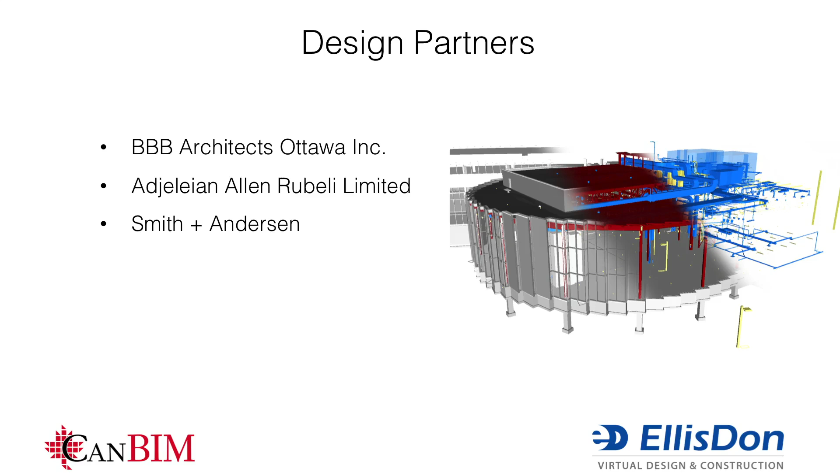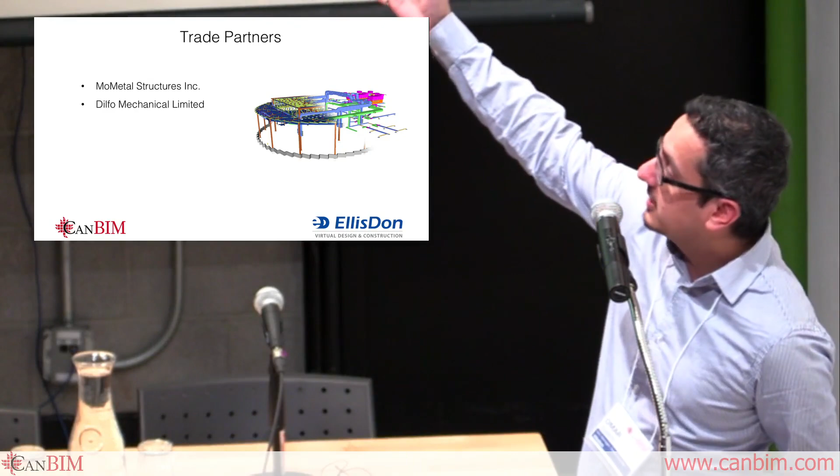Yeah. So this project, we had a lot of input from our designers and our critical trades. So the designers are BBB Architects, Ottawa Incorporated, AAR Limited, and Smith + Andersen did the electrical and the mechanical. Our trade partners were MoMetal Structures and Dilfo Mechanical Limited. And you can actually see their work right there. That is actually MoMetal's steel model, and that is actually Dilfo Mechanical's mechanical model.

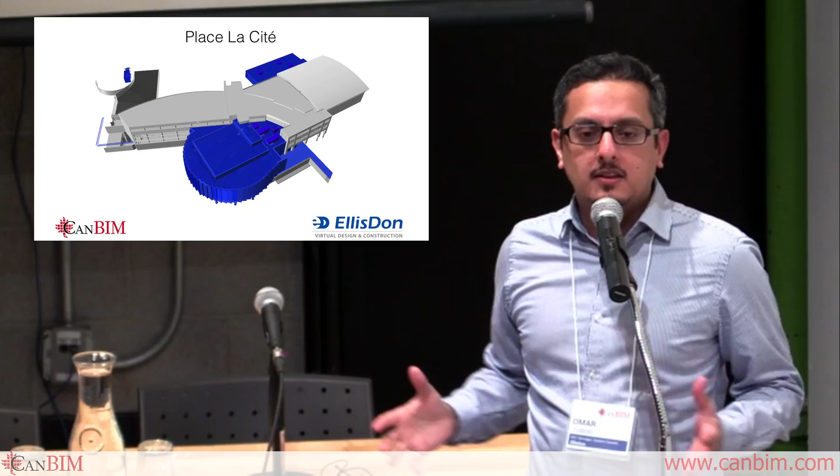And now you're wondering what the project is. So the blue highlighted is actually what the project is. The gray area is existing. So we're adding in this large circular atrium space, which is going to be mixed use. And in the back of the building, it's a prefabricated structure that's expanding the athletic space. What you don't see on this is also some interior work. So they're going to be adding a bistro on the inside. And this is all existing space.

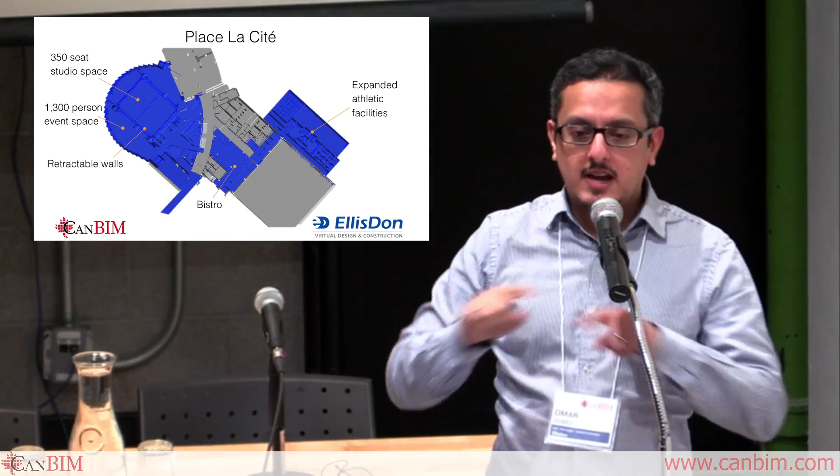So if you go back to the presentation just before mine, laser scanning, getting an idea of existing conditions and so on. So there's definitely a lot of existing conditions. And the way La Cité is built, it's in a big circular shape. Down the center corridor of this massive circular shape, you've got your main utilities, your main services. And this construction is going to be tying into that, right down that circular corridor, you can see there right next to the largest portion of blue in the bottom left corner.

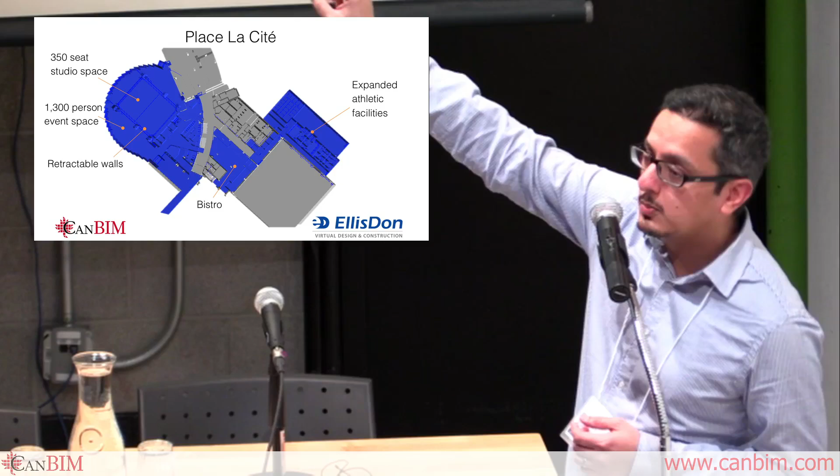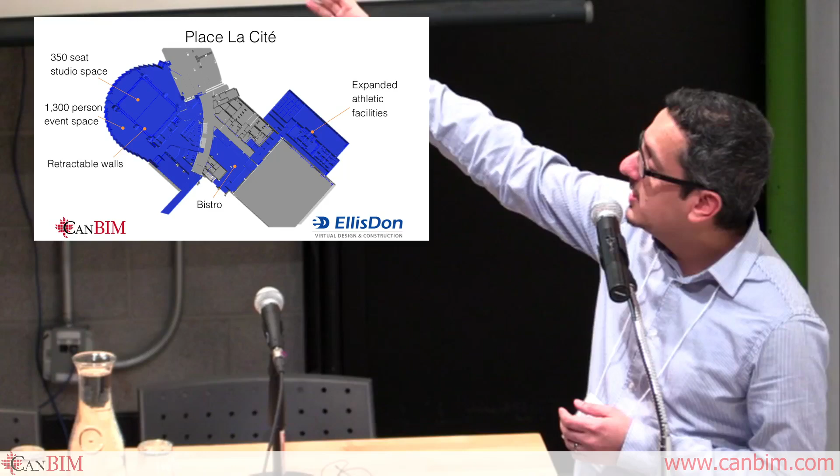And so it's going to have a 350-seat studio space, and it's got retractable walls. Once those walls are retracted, you're going to have a 1,300-person event space. So Jerry, if you're listening, maybe next year we can do this there. That'd be pretty sweet. And obviously the bistro and the expanded athletic facilities.

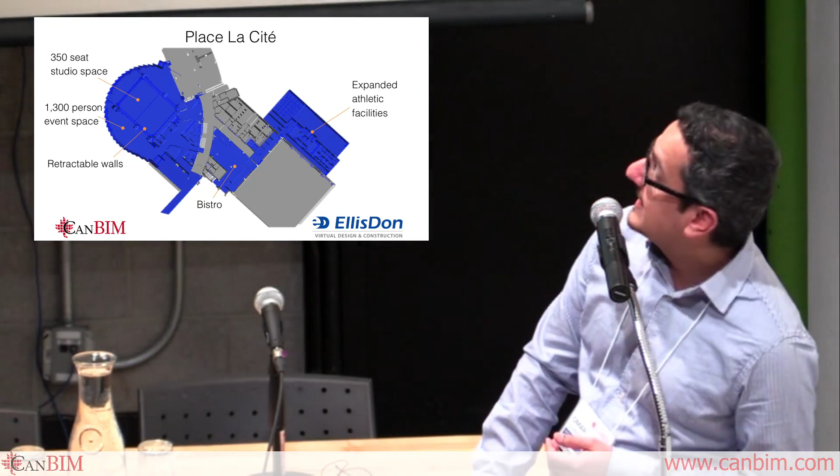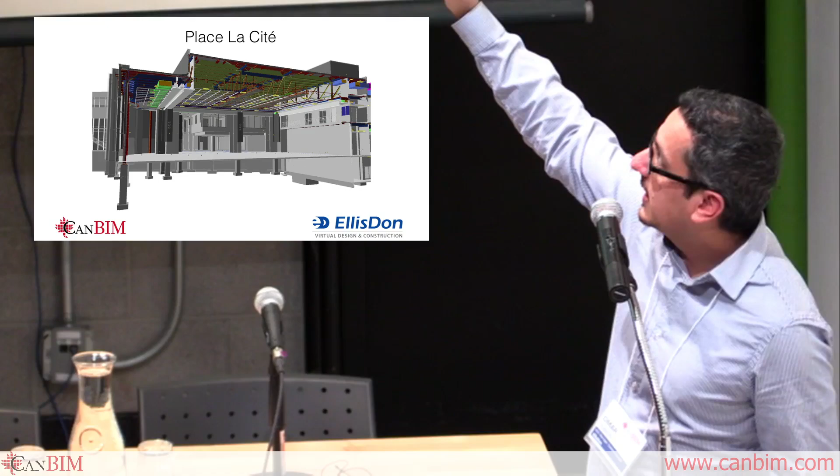And just to give you a sense of perspective, that's actually double height. So you've got 2 stories of open space, and then you've got a catwalk, similar to a theater, above. You can just barely make it out. It's in orange, and you can see all the M&E that's happening.

So normally you'd think, wow, this is a big open space. It shouldn't be difficult. But the bigger the space, the more important it is to the client that it needs to be as big as possible. So the client tends to squeeze ceiling space as much as possible, which tends to give us a lot of headache when it comes to putting in the massive ductwork that you need to push the air into this wide open space.

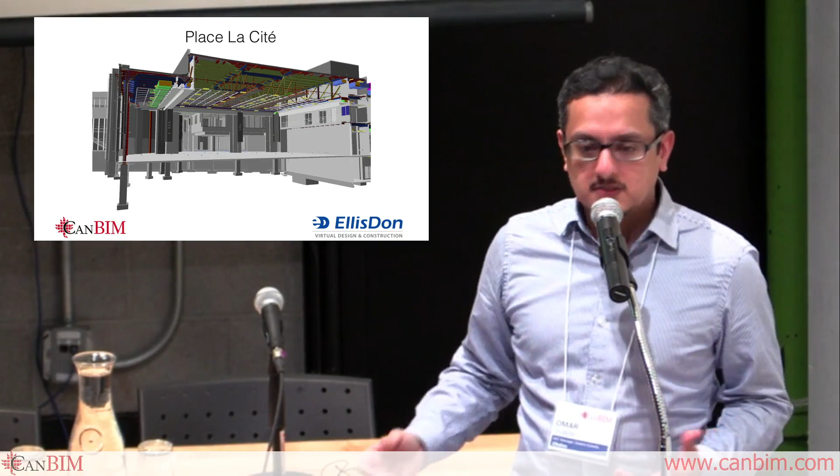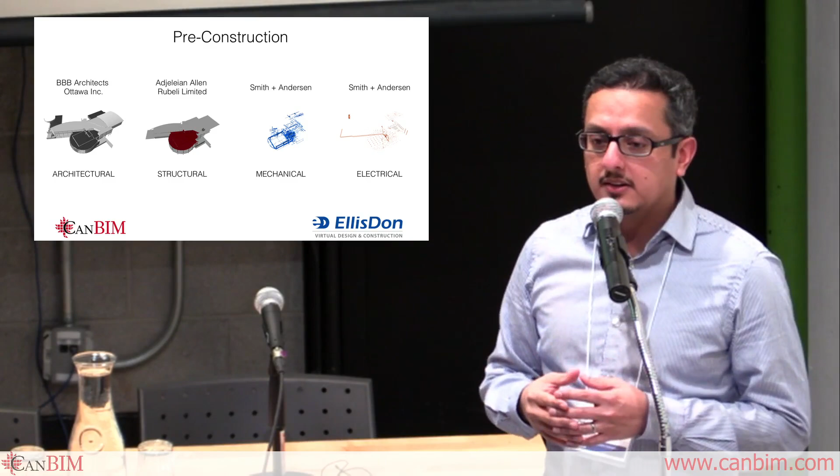So for pre-construction, of course, we had the architectural model, structural, mechanical, and electrical. And we also did a significant amount of design coordination, as the title indicates. The designers were attending weekly meetings, taking the clashes, having discussions, and it was a very collaborative experience.

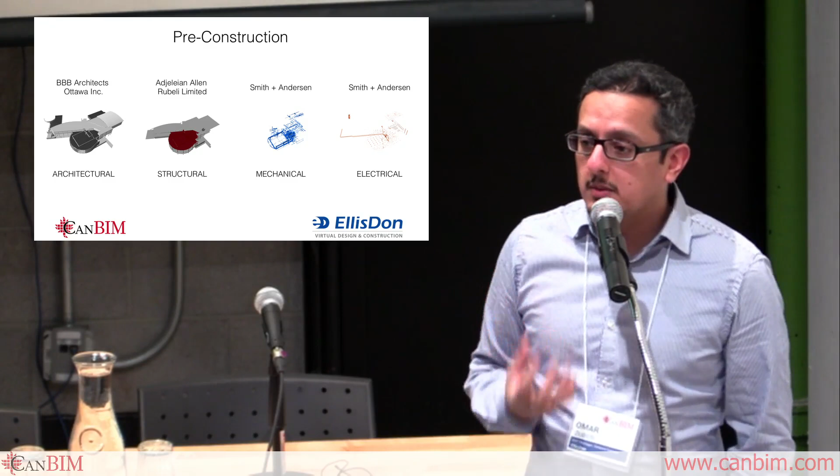And one of the things we did, this was an EllisDon initiative, pretty much internal, where we took the architectural, structural, mechanical, and electrical models and pushed them into Assemble. So Assemble is an online system that basically lets anyone with a web browser log in with the proper credentials and view and interrogate the model.

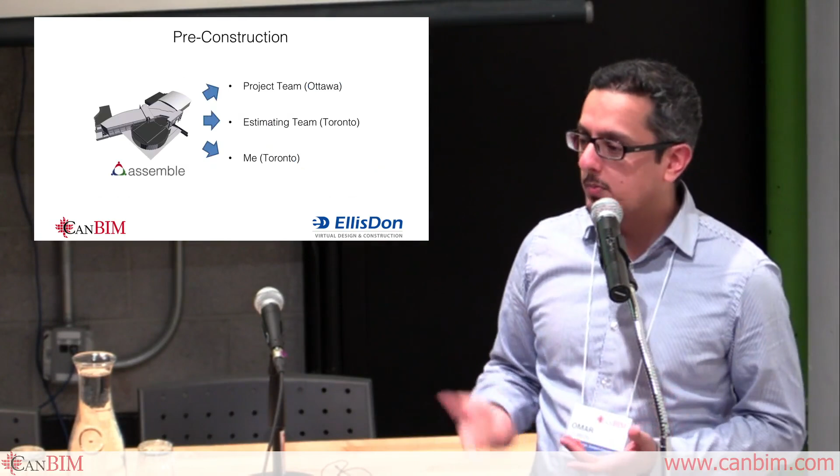The project team in Ottawa on site was able to, with their internet access, open up their browser, go to the website, get a sense of the space and what's going on, and potentially do some planning on what they're going to do next out on site.

The estimating team in Toronto can all attack the model at the same time and start tagging different objects, and Assemble has this great thing where you can extract quantities. So similar to the schedule extraction that you can do straight in Revit, this is, I'd honestly say, a better system.

Revit lets you do some level of filtering, but if you really go crazy with this, you can actually use SQL search queries, structured query language, to really filter down the information that you're pulling from the model with regards to quantities, with regards to counts and so on and so forth.

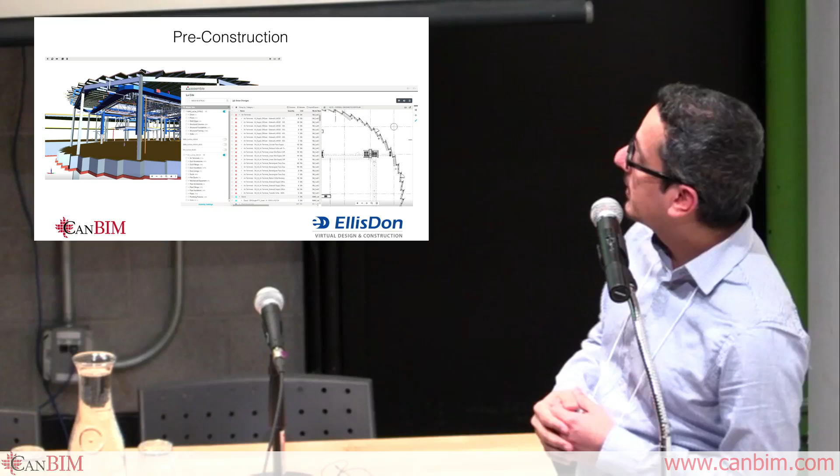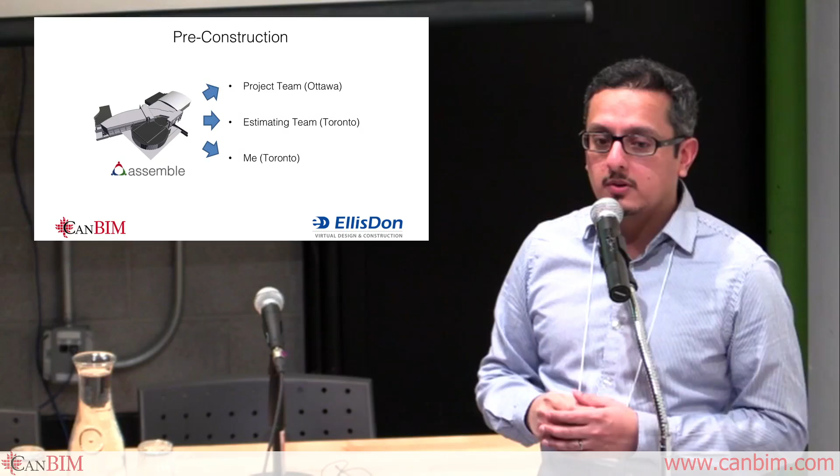And of course, jumping back a slide, I was in Toronto. This entire time, this project's happening in Ottawa, and I'm sitting in Toronto overseeing the design coordination meetings, and making sure everything's available to everyone here in Ottawa.

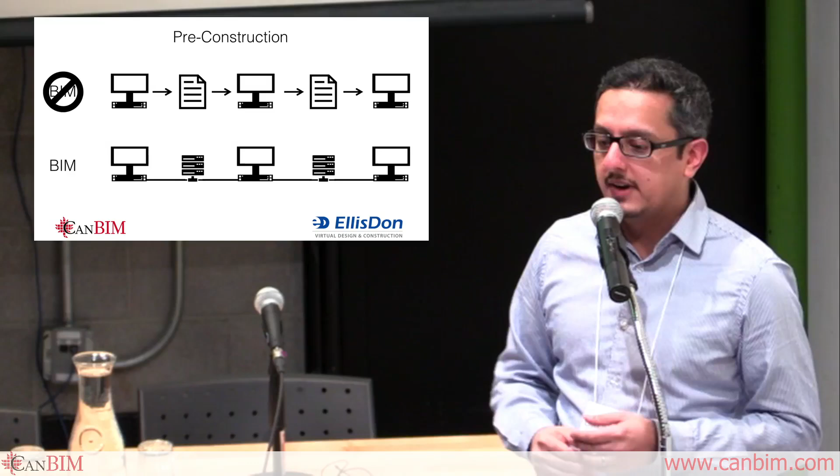Another big thing, a lot of people here are familiar with how things went before BIM. Oh, you've hit 50% design development, stop what you're doing, produce some 2D drawings so I can review it and make sure you guys are on the up and up. Never mind what happened all the way up to that 50% DD. We're now going to review it, make sure your drawings are up to speed, and then we're going to say, no, this isn't good enough.

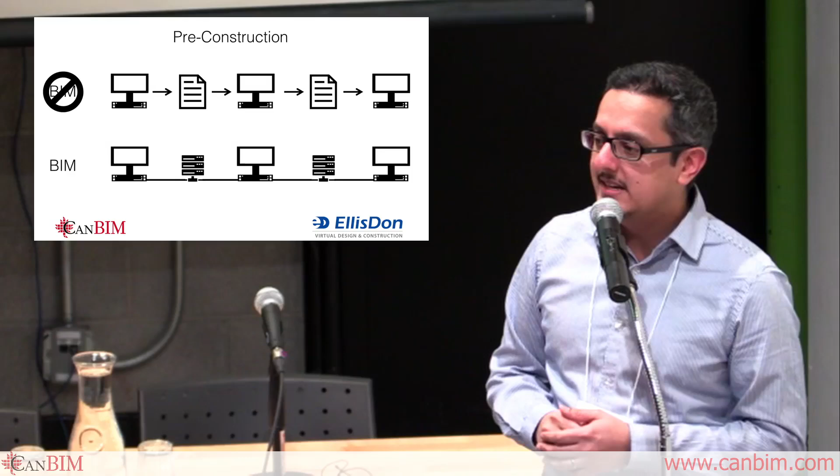So it's a static... forget the word. It's not the most cohesive and collaborative of processes. Whereas once you have BIM involved, once you have something like Assemble, everything's digital. You don't have to stop what you're doing and flatten your 3D into 2D and produce drawings that are up to snuff, that are 50% DD level, and hand it off to the next person to review, red line, and hand it back.

So in this case, we're getting weekly progress models. Every week, we're just getting these models. They don't have to do extra work in order to provide us this information. All they have to do is just give us access to their FTP. The work they're already doing, we're able to plug into. We get this information, we interrogate it, we query it, we ask our questions, and it updates on a weekly basis. It's a much more collaborative process.

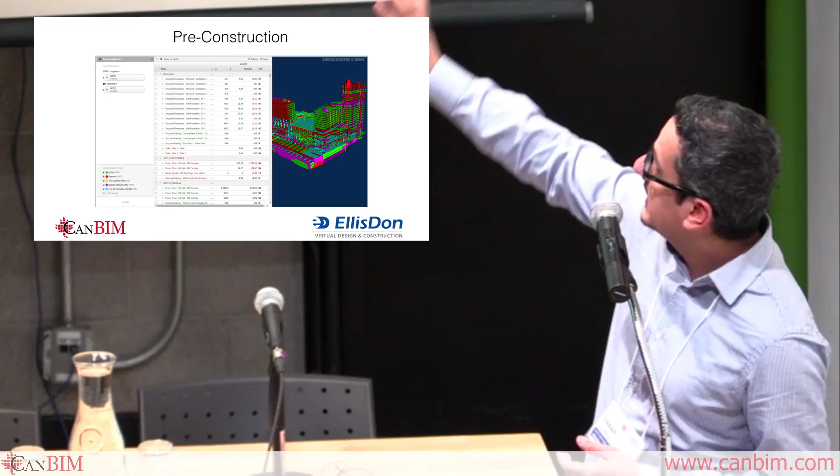Another nice thing about Assemble, the different versions. You can actually compare different versions. I get a new version of a model week after week, and I can go back to any previous version and compare it. It literally color codes it for me. With 2D drawings, every time you give me an updated drawing, you got to cloud what you changed. Guess what? This does it automatically.

And then I can also whittle it down and only show me things that have been added, only show me things that have been deleted. So I can quickly extract that to Excel, plug that into my estimate, and go about my day.

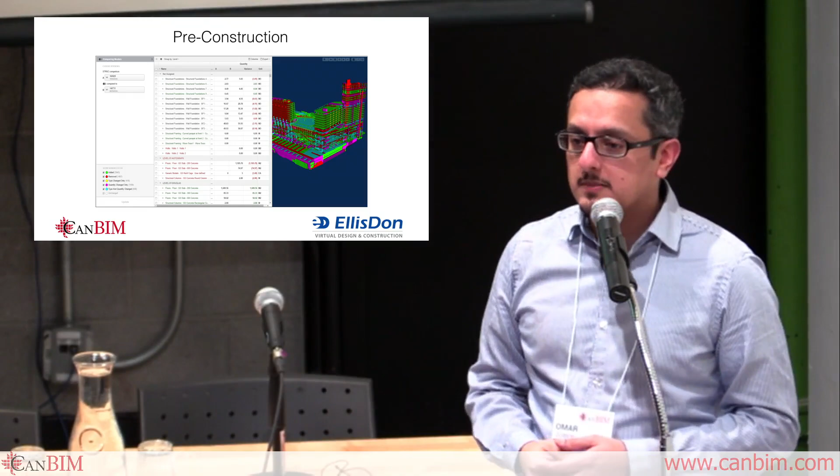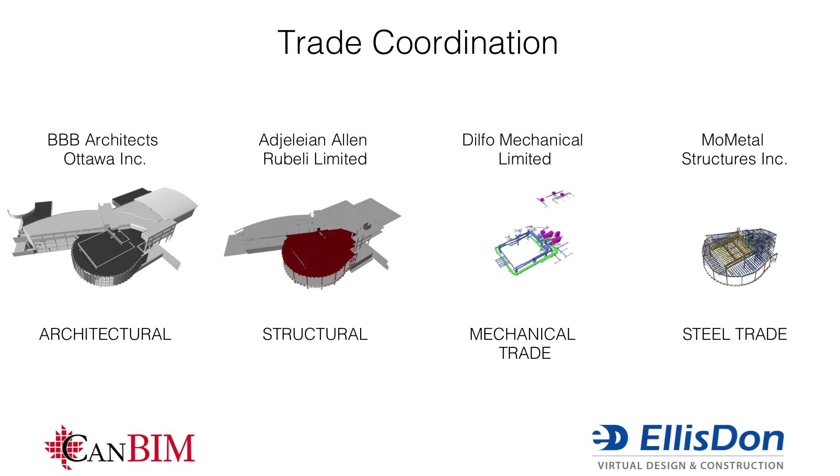Trade coordination. We still took the architectural and structural models, and then we started plugging in the mechanical models and the steel models. And this is where things really started getting interesting, and where we start using Navisworks heavily. Navisworks is when we really start getting into the interference coordination, and we start to look at, well, okay, this doesn't work this way, how about this way?

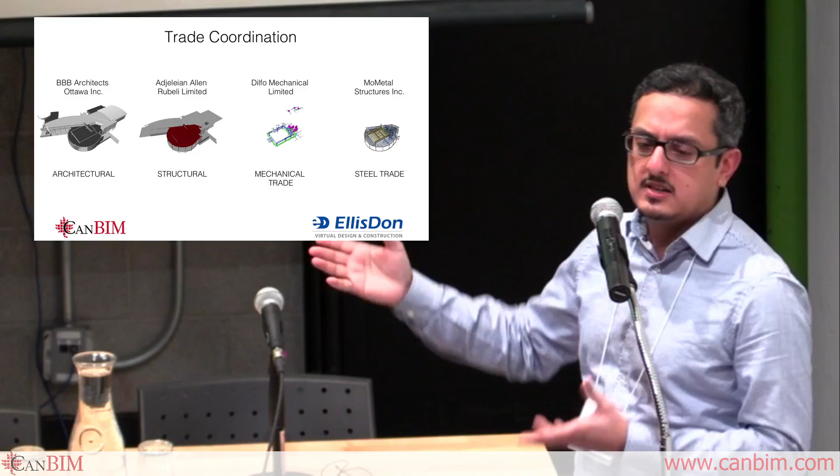We start taking viewpoints and screenshots, and having online conversations saying, is this a design issue? Can we fix this through means and methods? Can the trade deal with it? Or do we need to send this back to the designers to figure out? This giant duct doesn't even fit in this corridor. Can we downsize the duct? Can we upsize the velocity of the air? So on and so forth.

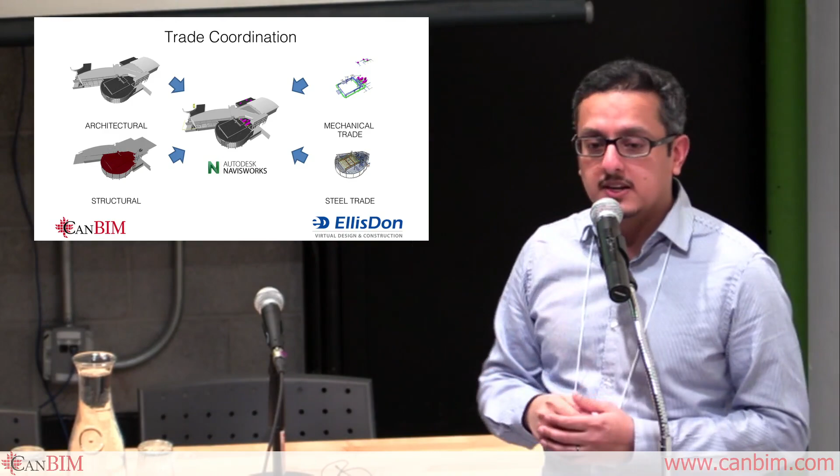And of course, that file. Assemble was nice. It's a website. Everything's up to date; whenever anyone logs in, it's the latest stuff. Navisworks, on the other hand, I need to send out the latest. You have to go to the FTP and make sure you've got the latest file. You download it, and this one file has a full history of all our clashes, screenshots, and communications. You can slice it and dice it and take your own screenshots any which way you want. And it also serves as a nice historical database.

So every week I'm creating a new file. I still have the old file. We can still go back and get our information on, well, where did we go wrong if we went wrong? Or why did we do this? Oh, well, in week 3, this is why we did this, and so on and so forth.

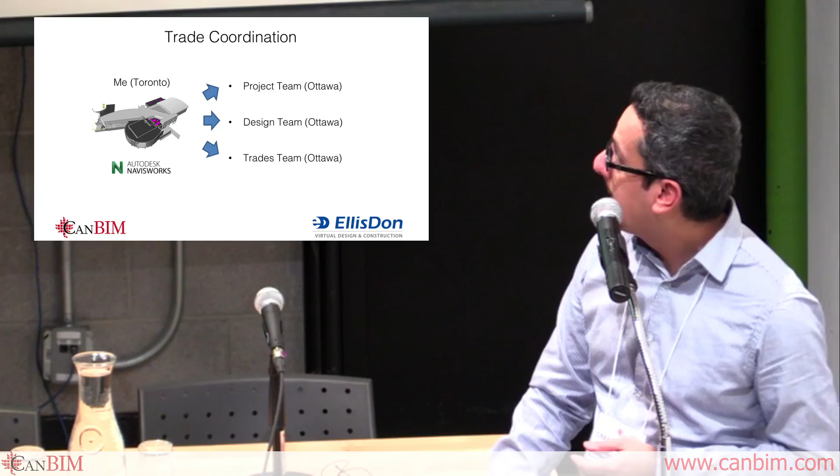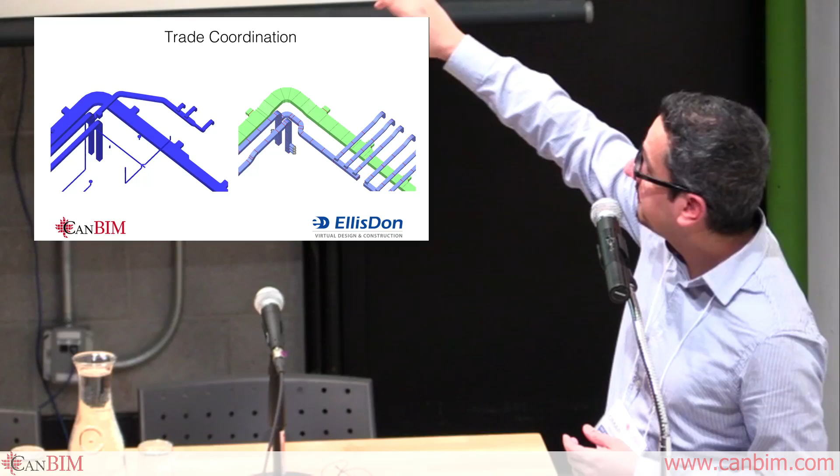So Dilfo Mechanical went ahead, they've managed to figure out how to reroute it, and they got the designer's buy-in to actually reroute it that way and actually have these extra long fingers to the vent locations near the windows. So this is a perfect example of if this hadn't been figured out now, then we would have been stuck scratching our heads at construction time. We would have had to squeeze the duct in order to get it to elbow around where it does, because the steel would not have been dropped as low as it needed to. So this is a prime example of why coordinating well ahead of time helps the finished product.

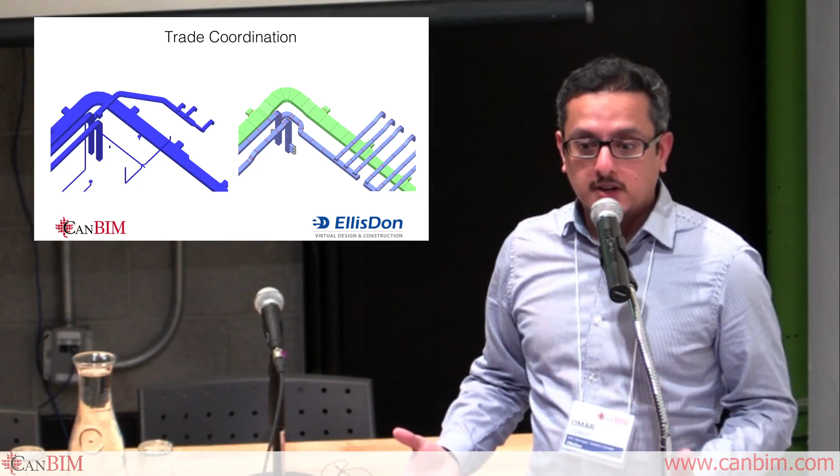And of course, that's actually trade coordination. You can barely make it out. But there's the steel, there's the duct, there's even more duct, there's piping, and that steel had to be rearranged multiple times. So we have these large air handling units on top of the roof, and obviously it's got steel to support those air handling units, but at the same time duct is coming off the underside, right above used space, right above student space. So in order to get these massive ducts to squeeze into the ceiling, not only do you have to get them past the steel, but the steel has to line up with them. And you also have all these other services running around them.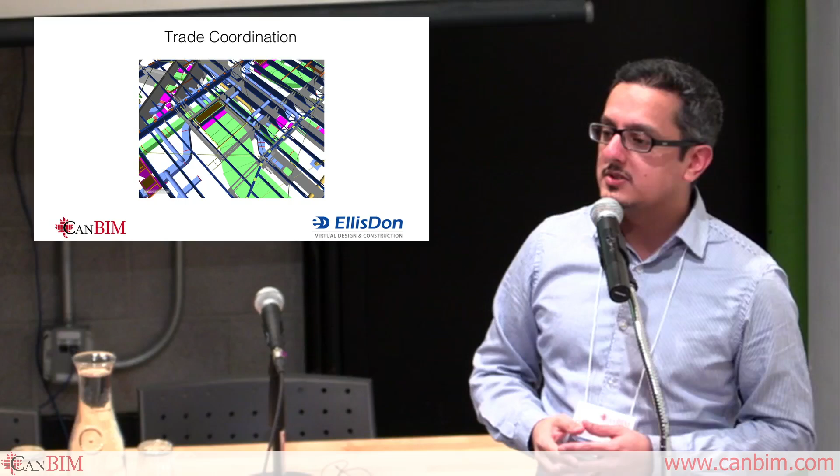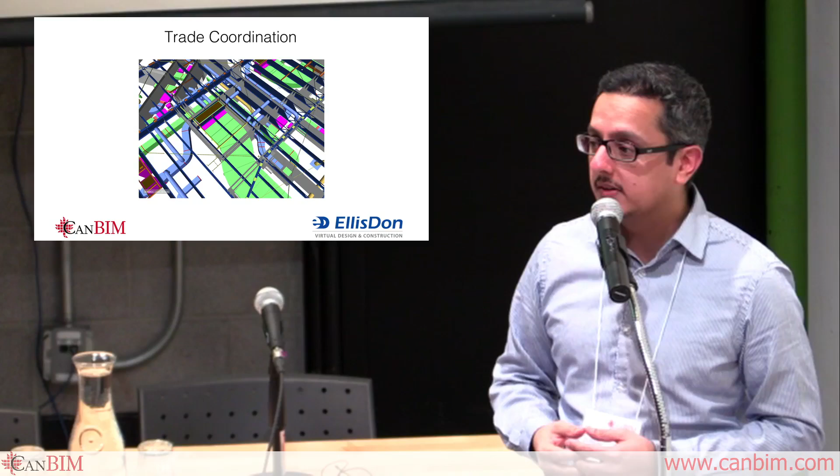We did have to drop maybe one ceiling 2 inches just to make it fit, and that's because of the flanges. This is the first thing I tell one of my coordinators when they need to be deployed: watch out for flanges. Okay, so you've got a duct. It's a 900 by 400 duct, but guess what? That's not a duct. A duct is so much bigger because it's got 2.5 inches of flanges all the way around it. And don't forget the insulation. And what about the hangers? So there's all kinds of fun stuff that needs to be taken into account.

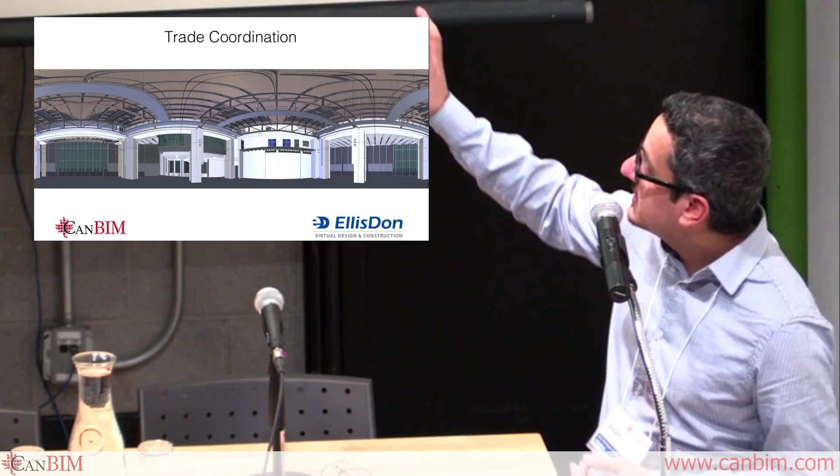Another nice thing we did, now this obviously looks odd with all these curved ceilings. That's actually a 360 panorama pulled out of the 3D model. So there was one situation where we needed to know if the air handling units were going to cause an eyesore outside the building. So the discussion was, well, is the client going to be okay with these air handling units on a 1.5 meter step, which is going to bump them up another 1.5 meters and then make them visible from down below?

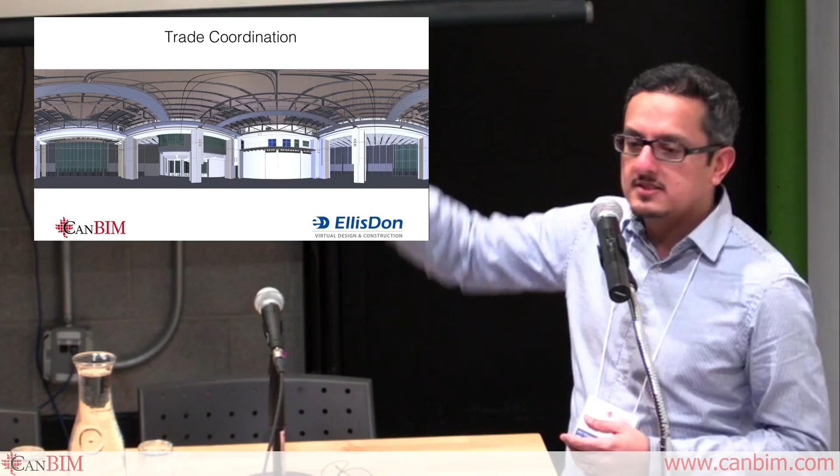So what we ended up doing with the miracle of Google Cardboard, actually, we went ahead and did a 360 render from different locations outside the building, and people could actually put it on their face and look around at the exterior of the building and say, yeah, that's not an eyesore. I can't see the air handling unit from here. We're good to go.

And of course, in construction, this is jumping back to Assemble again. Assemble's also got a mobile app. So you can actually take the model onto your iPad, walk out on site. Another great thing about Assemble, not only does it let you interrogate the object data and actually pull quantities, but you can also add parameters. So if I add a parameter that says install date in Revit and then synchronize it up, I'm going to have that parameter available to me to walk out on site, take a look at a piece of duct and say, today's the date. So this duct has been installed today.

So now you're getting to the point of real-time install tracking, where at the end of a project or halfway through a project, you'll know exactly how much is installed. Feed that into your estimate. You'll know how much material you spent to date that's actually physically installed on site. And at the same time, you can start feeding this into potential big data, where you can see, well, 3 months ago, 3 years ago, this trade over here was really destroying their schedule. They were not installing properly. They were not meeting their goals. Whereas this guy over here, sure, he costs an extra $5 an hour, but guess what? He's on time, and he's less of a headache. So then decisions can now be pulled from this information, and you can start making better decisions.

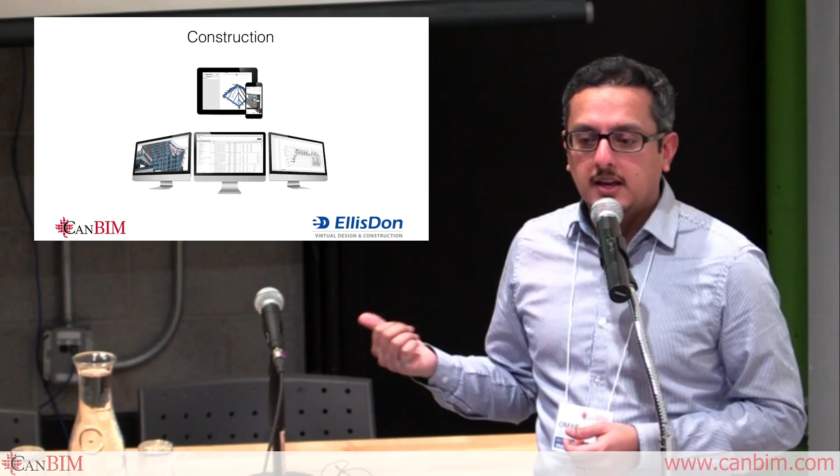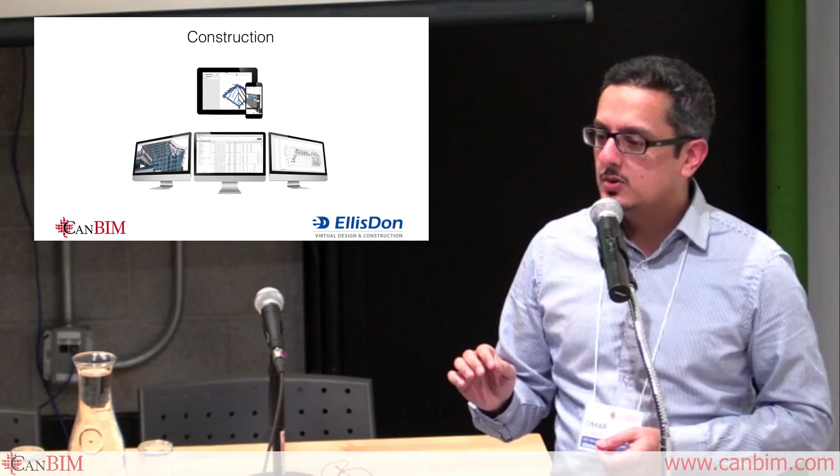And you don't have to be the superintendent. Think of it, in this day and age, if you're the superintendent and you've dealt with both these trades, you'll know, okay, this trade's better than this one, less of a headache. But what if you don't have a superintendent who's worked with both of them? Well, now you've got data that can do the same thing.